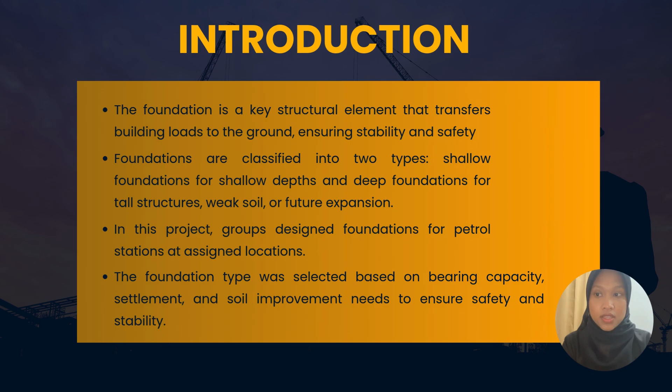For the introduction, the foundation is a key structural element that transfers building loads to the ground, ensuring stability and safety. Foundations are classified into two types: shallow foundation for shallow depths and deep foundation for tall structures. In this project, our group designed foundations for petrol stations at assigned locations, with the foundation type selected based on bearing capacity, settlement, and soil improvement needs to ensure safety and stability.

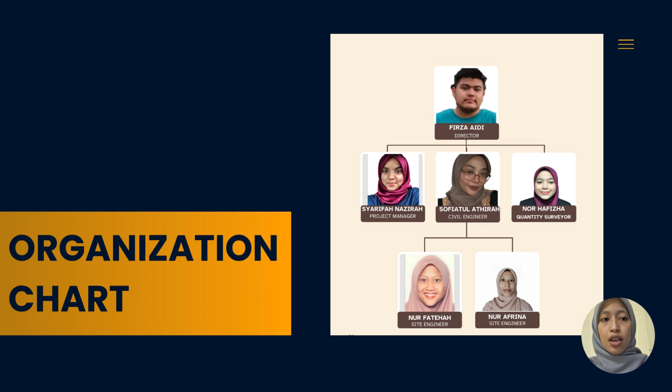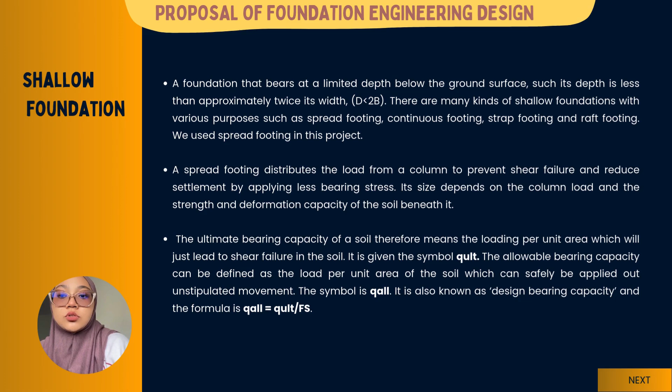The ultimate bearing capacity of soil means the loading per unit area which will just lead to shear failure in the soil. It is given the symbol Q_ult. The allowable bearing capacity can be defined as the load per unit area of the soil which can safely be applied without unstable movement. The symbol is Q_all, also known as design bearing capacity, and the formula is Q_all equals Q_ult over Fs.

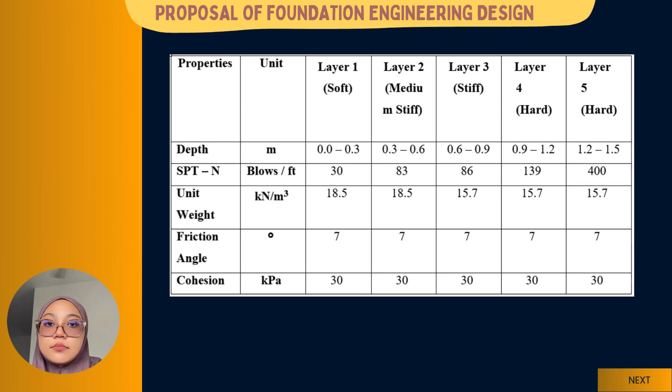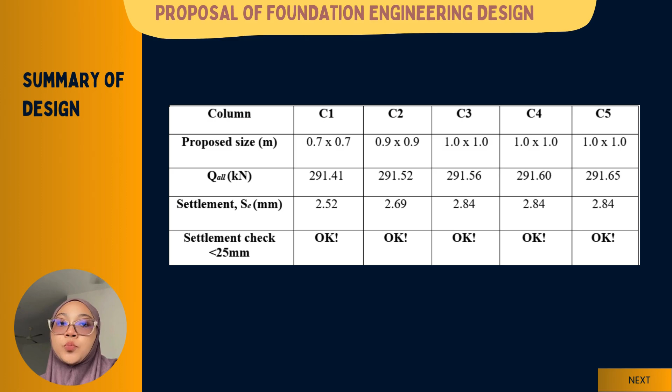The last one is C5, column 5. The proposed size is 1 times 1. The Q all is 291.65 kilonewton and the settlement is 2.84 millimeter. All the column settlement checks are less than 25.

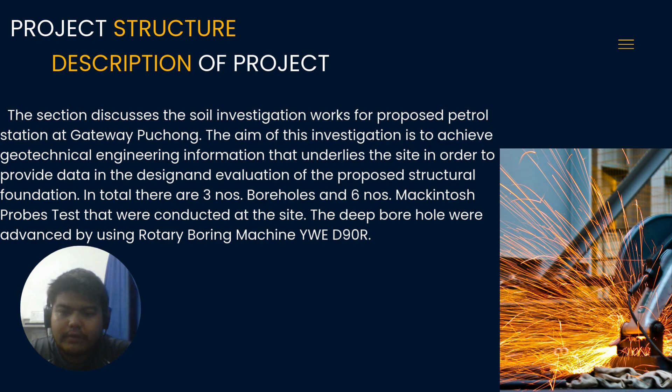In total there are 3 nos. of borehole and 6 nos. of Mackintosh probe tests that were conducted at the site. The deep boreholes were advanced using rotary boring machine YWE D90R.

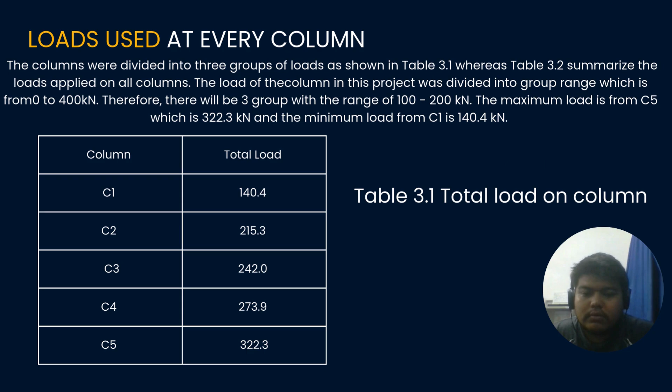The maximum load is from C5 which is 322.3 kilonewtons, and the minimum load C1 is 140.4 kilonewtons. C1 is 140.4, C2 is 215.3, C3 is 242.0, C4 is 273.9, and C5 is 322.3.

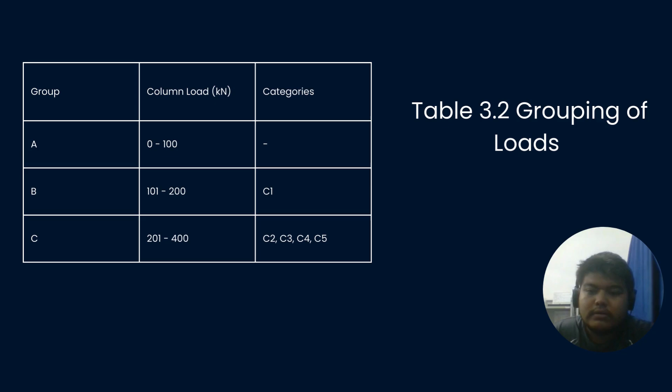For Table 3.2, grouping of loads: Group A, 0 to 100 column load, category unknown. Group B, 101 to 200, category column 1. Group C, 201 to 400, categories C2, C3, C4, and C5.

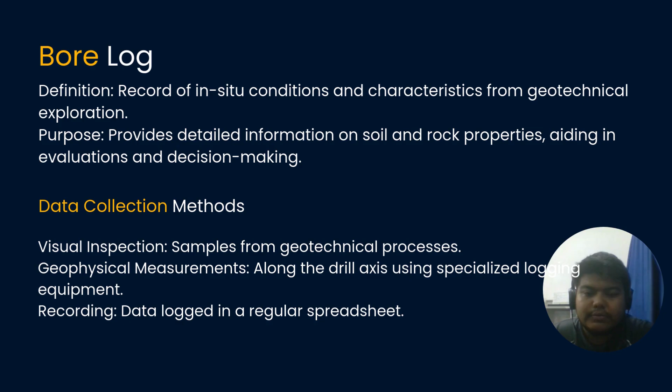Borelog definition: record of in-situ condition and characterization of the geotechnical exploration. Purpose: provide detailed information on soil and rock properties, aiding in evaluation and decision making. Data collection method: visual inspection, sampling from geotechnical process, geophysical measurement along the drill axis using specialized log equipment, recording data log in a regular spreadsheet. Importance of bore log data: soil consistency and types help in understanding soil behavior.

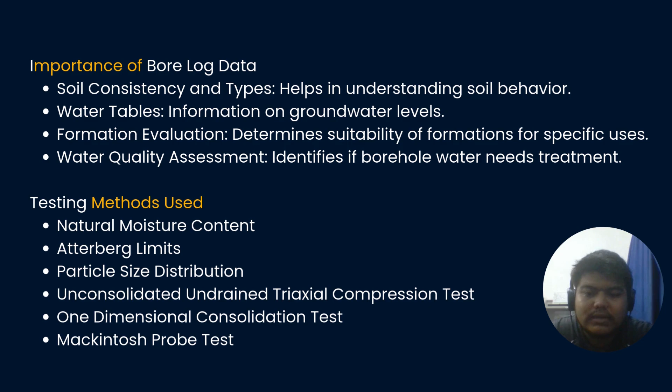Water table: information on groundwater level, formation evaluation, determine suitability of formation for specific uses. Water quality assessment: identify if borehole water needs treatment. Testing methods used: natural moisture content, Atterberg limits, particle size distribution, unconsolidated undrained triaxial compression test, one-dimensional consolidation test, Mackintosh probe test. Type of soil: gravel.

The soil profile is a vertical segment of the soil that shows all of its layers. The soil profile extends from the soil surface to the parent rock material. It allows you to examine the structure and characteristics of soil, which are obtained from laboratory tests.

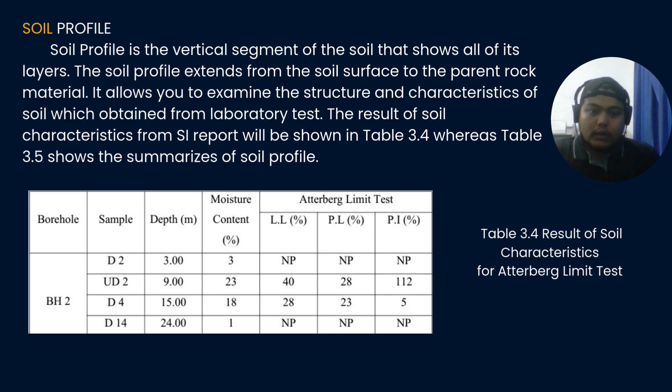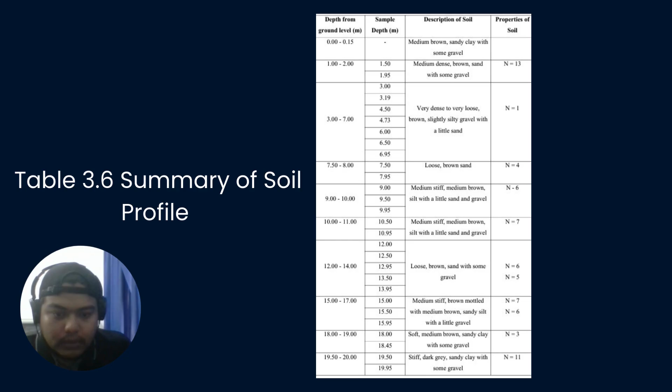This is a summary of the soil profile from Table 3.6, showing the depth of the ground level from 0.0 until 20.0, with the property of soil for N13 to N11. This is a summary of the soil profile from 21 to 33.10.

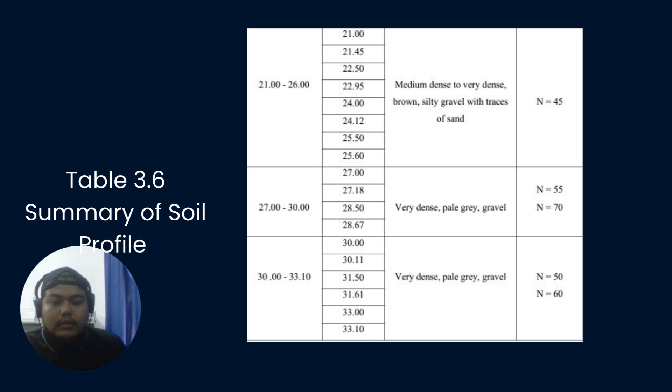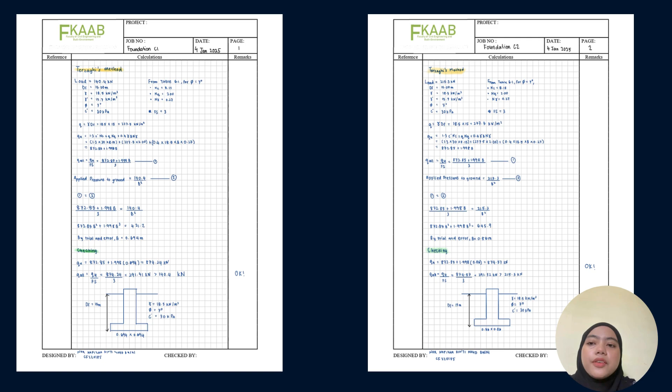So the second analysis is we also use the Terzaghi method, and the load is 215.3 kilonewton. The flow of calculation is still the same, and we calculate q, qu and qall. So we apply pressure to the ground, which is 215.3 divided by B squared, and we get the value of B by trial and error, which is 0.86 meter. And for the checking, the value of QU is 874.57 kilonewton, and the qall is 291.52 kilonewton, which is greater than our load, which is 215.3 kilonewton.

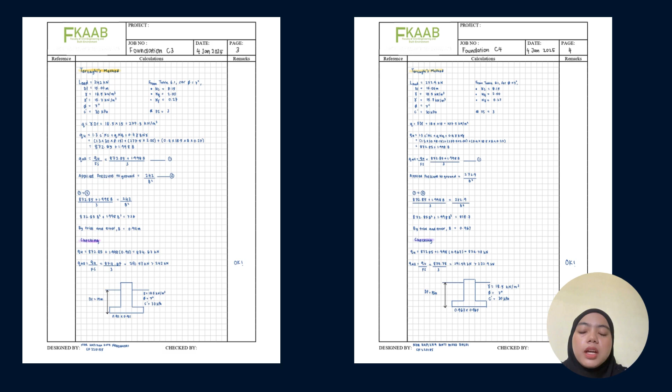So the next load is 272.9 kilonewton, and we calculate still using the same method, which is the Terzaghi method. We calculate the value of Q, QU, QR, and we can apply pressure to the ground, which is 272.9 over B squared. And we got the value of B by using the trial and error method, 0.967, and we go to the checking. We got the QU 874.78, and QR is 291.59, which is greater than 272.9 kilonewton.

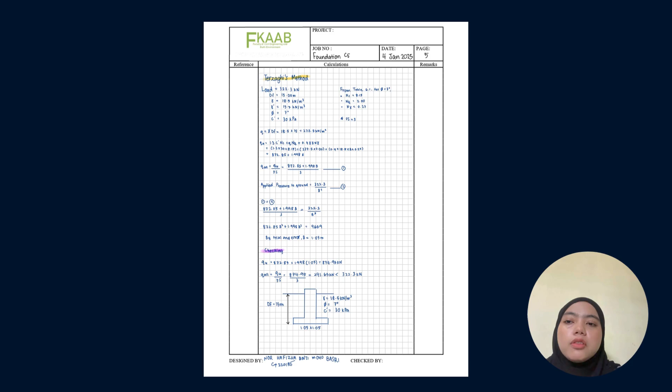So the next load is 322.3 kilonewton. We calculate the value of Q, QU, QR, and apply pressure to the ground, which is equal to 322.3 over B squared. And then we got the value of B, 1.05 meter, and the value of checking is 874.95 kilonewton, and QR 291.65 kilonewton, which is less than 322.3 kilonewton.

So the next one is for settlement checking. For column 1, we propose the size 0.894 times 0.894. Then we determine the net allowable bearing pressure in kilonewton per meter square, which is 2428.88 kilonewton per meter square. Then we determine the settlement, where B must be less than 1.22, and we got the settlement 2.52, which is lower than 25 millimeters. So we can accept this column 1 value.

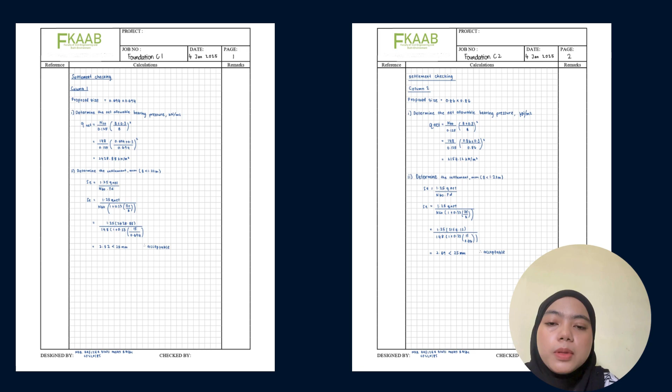For column 2, we propose size 0.86 times 0.86, and then we determine the net allowable bearing pressure, and we got 2154.12, and the settlement we got is 2.69, which is lower than 25 millimeters, so we can accept this value. The proposed size for column 3 is 1 meter times 1 meter. We got the net allowable bearing pressure, which is 2000.96 kilonewton per meter square, and the value of the settlement is 2.84, which is lower than 25 millimeters, so we can accept this value.

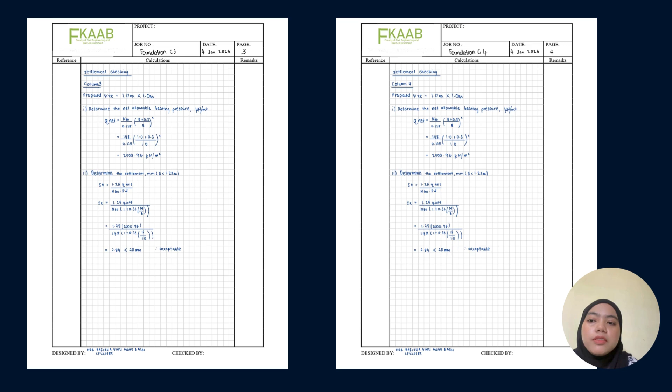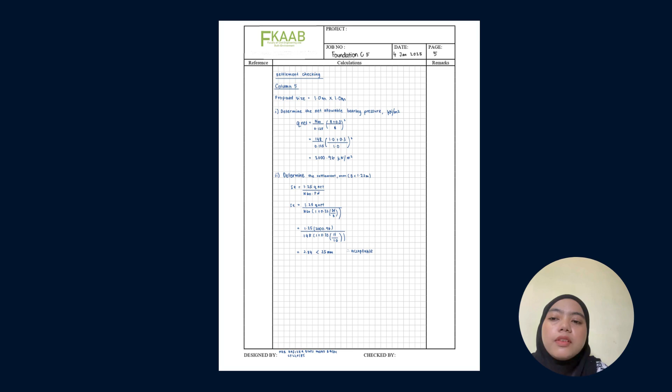And then for column 4, the proposed size is 1 meter times 1 meter, and the net allowable bearing pressure is 2000.96 kilonewton per meter square, and the value of the settlement is 2.84, which is lower than 25 millimeters, so we can accept this value. Next is column 5, where we propose 1 meter times 1 meter, and we got the net allowable bearing pressure 2000.96 kilonewton per meter square, and the settlement is 2.84, lower than 25 millimeters, so we can accept this value.

My name is Sharifah Zira binti Said Kamil Rifai, and my matric number is CF220137. So here I am to explain the discussion and conclusion.

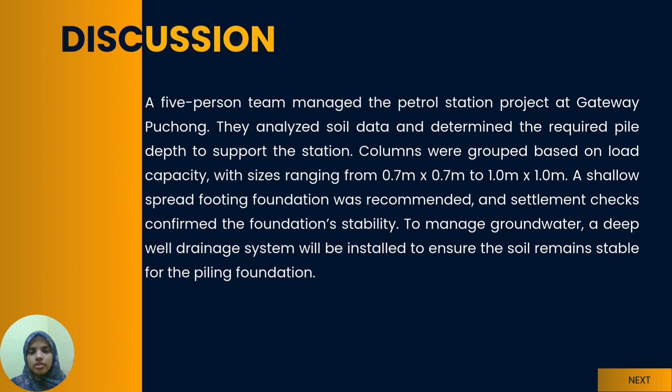Discussion. A 5-person team managed the petrol station project at Gateway Puchong. They analyzed soil data and determined the foundation required to support the station. Columns were grouped based on load capacity, with sizes ranging from 0.7 meter length and 0.7 meter width to 1 meter length and 1 meter width. A shallow spread footing foundation was recommended, and the settlement check confirmed the foundation stability. To manage groundwater, a deep well drainage system will be installed to ensure the soil remains stable for the foundation.

Conclusion. Through the research, our team learned how to design a foundation using the shallow foundation approach. We conclude that a spread footing foundation is suitable for this project, as it can adequately support the structure. Even though a pile foundation could be used within the budget, generally low-rise buildings of 1 to 4 stories benefit from a distributed foundation, requiring firm soil to support the structure. This approach is both physically and financially safe, making it the preferred choice.

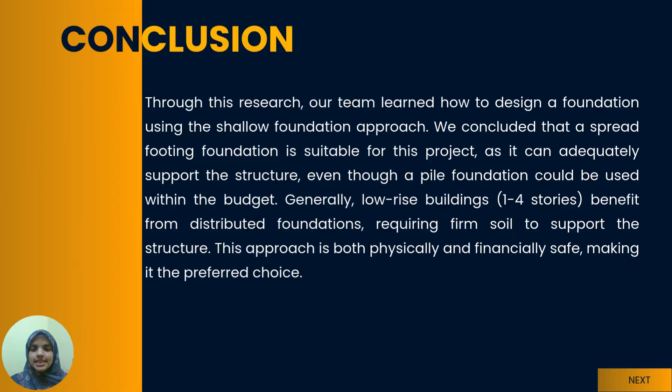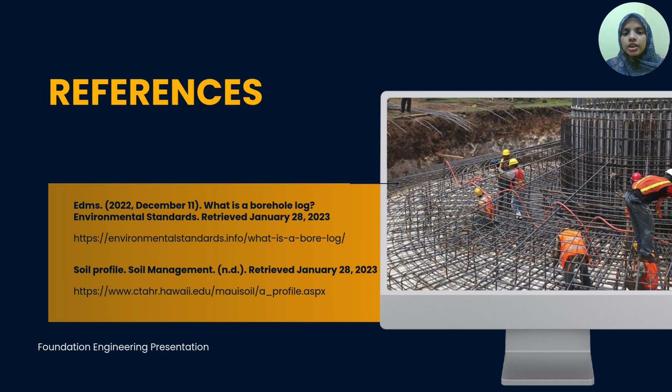References. We refer to two websites. One is a borehole log environmental standard, retrieved January 28, 2023, and soil profile soil management, January 28, 2023.